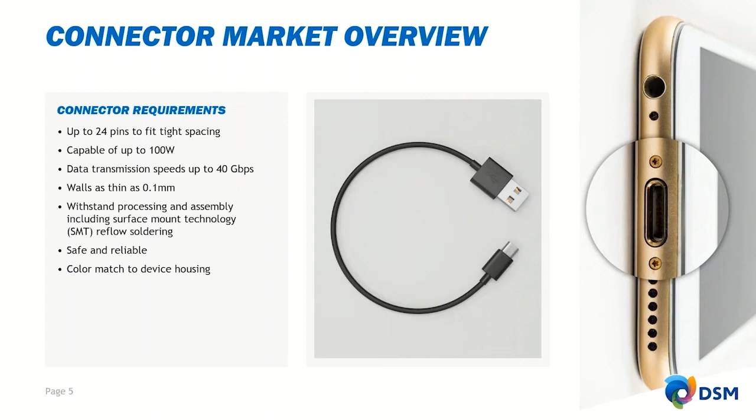Lastly, the color of the connector can be important for design teams to create a visually appealing device or to differentiate the type of connector.

So what does this mean in terms of material properties? The materials need to be thermally stable to withstand reflow soldering, and they also need to maintain mechanical integrity to handle the impact and wear from tens of thousands of insertion cycles.

The material needs to be able to be injection molded in order to make very thin walls with tight tolerances. Weld line strength retention of a material can also be really important for thin walls and small intricate parts so that the part doesn't break.

And the material must allow for fast processing and short cycle times to manufacture millions of components. And this means that the material will need to be high flow.

Safe and functional. Materials need to be safe for people and the environment, and at the same time provide electrical properties that are capable to handle fast data transfer speeds and high power without electrical tracking, and often need to be available in a wide range of colors.

So moving on to the DSM materials portfolio for connectors in consumer electronics.

At DSM Engineering Plastics, we focus on semi-crystalline polymers, which in general tend to perform at higher temperatures. ECOPAXX PA410, STANYL PA46, ForTii PPA, and Xytron PPS, offered in the electronic space, are among the highest performing plastics that support designs covering the breadth of the connector industry.

These industries include automotive connectors, appliance connectors, connectors for consumer electronics, like we're talking about today, connectors for data center networking, and medical connectors.

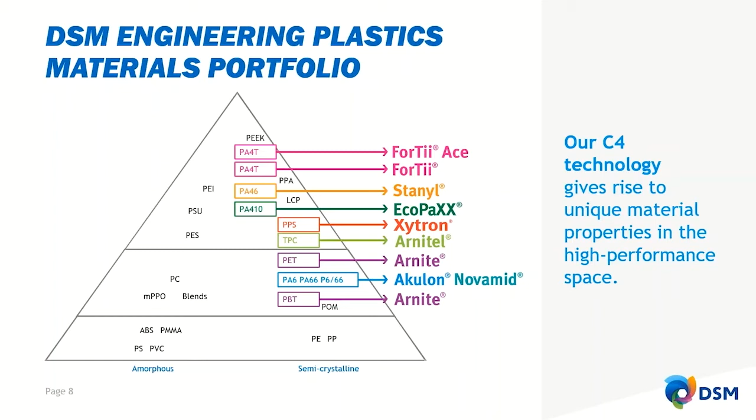ECOPAXX has found success in wire-to-board connectors and installation in power adapters due to its low moisture absorption. And Xytron polyphenylene sulfide has been successful in flat printed connectors and flat flex connectors, FPCs and FFCs.

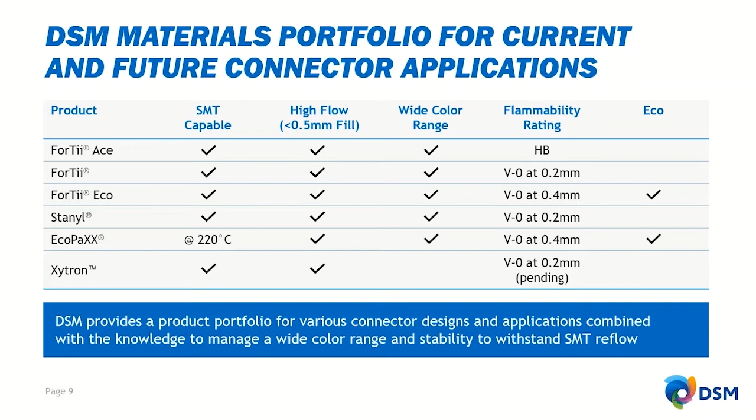Now, going a little deeper into the properties of STANYL PA46 that make it a popular choice for connectors.

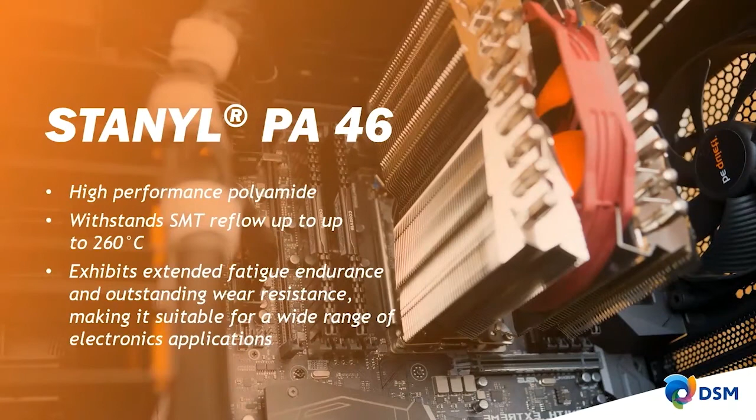A feature that sets STANYL apart from other materials is its colorability at high temperatures. Color matching is important for, as we know, sleek designs of smartphones, tablets, adapters, or other peripherals that we all use every day. And it can actually be difficult to match a specific LAB value, especially after going through

the high temperature reflow process. The colorant can also impact flow and mechanical properties, so it's important to find the right balance between the color and the material specifications.

Down below, I mentioned polycarbonate because it's often used as the benchmark material for colors because it can achieve very bright colors. But STANYL, which is a much higher temperature material, has been developed into a wide range of colors as well, including bright whites.

And it's manufactured to match colors post-reflow. Also worth mentioning is that ForTii and ECOPAXX also have both good color stability.

So as I've already mentioned, the thermomechanical properties are important in order to resist the high temperature reflow soldering process. And without going into detail, the 4-carbon or C4 technology in these polymers lends to higher crystallinity, which means that at elevated temperatures, the polymers can maintain their rigidity.

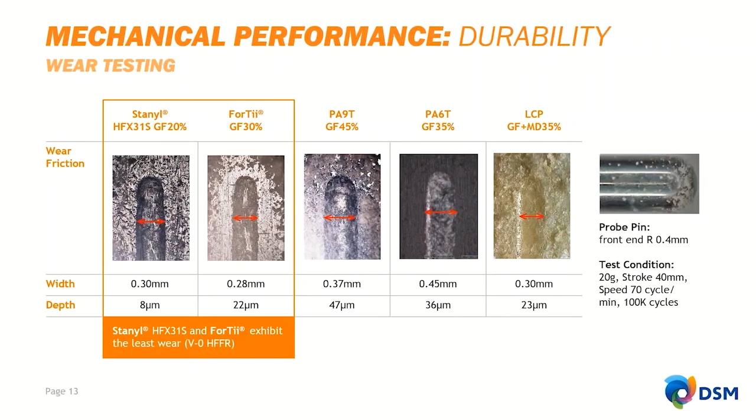In consumer electronics, connector designs can have walls less than 0.2 millimeters. I mean, these things are paper thin. And this can cause problems at the moment of trying to fill the part. Therefore, a high flow material is required, and high flow STANYL is available for these types of applications.

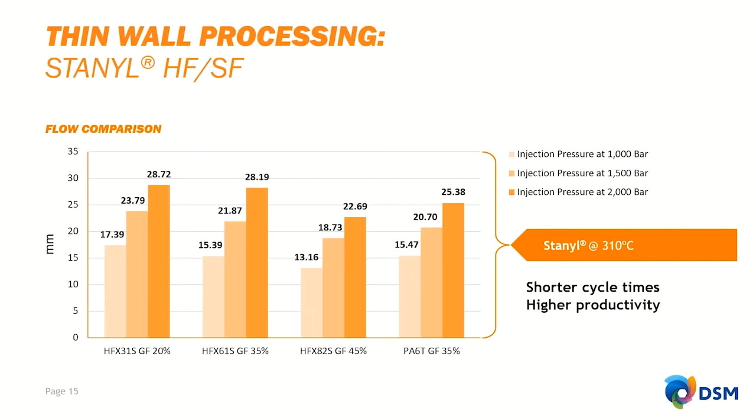For LCP, weld line strength is recognized as being a known weakness in the industry, but STANYL and ForTii both have flow fronts that bond well to retain weld line strength. This is important for parts, especially when they're small and thin, so that they don't break easily at the weld line.

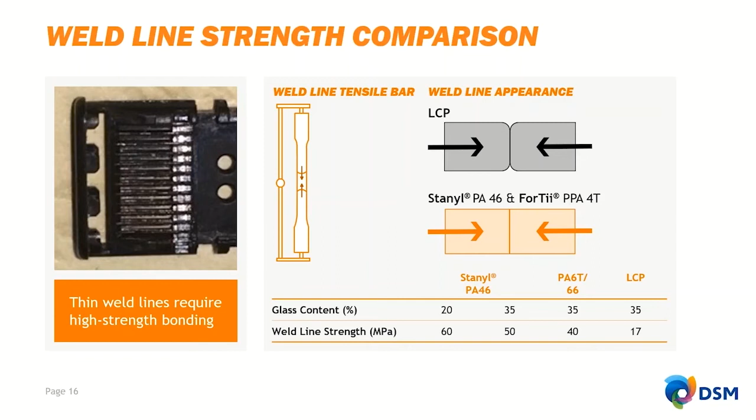A property that can be measured to ensure safe use of a device is tracking resistance. Electrical tracking is defined as the formation of electrical pathways through the material caused by electrical stress, water, or other contamination. As connectors get smaller and smaller and more pins are added, and these pins are required to handle higher power, tracking resistance becomes more and more important.

The comparative tracking index is a way to measure tracking resistance under wet and contaminated conditions. In the test, a salt solution is dripped onto the surface between two electrodes with an applied voltage. The test rates materials by the voltage potential they can withstand before tracking occurs. STANYL and ForTii are both in the highest category for tracking resistance in the CTI test.

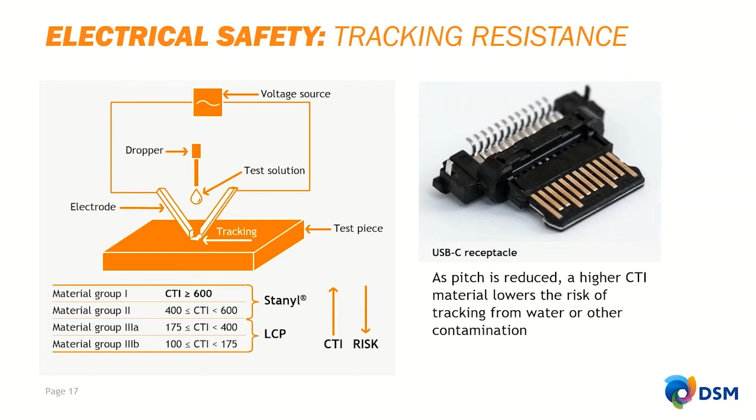In practical terms, this means STANYL will withstand higher contamination on the surface of the connector than the LCP material before tracking occurs. This is important in a USB-C connector because per the standard, the dimensions are set and cannot be changed, so the size of the connector stays the same. But what can be done is to use a safer material that has a higher CTI value like STANYL, which will ensure a safer device and component.

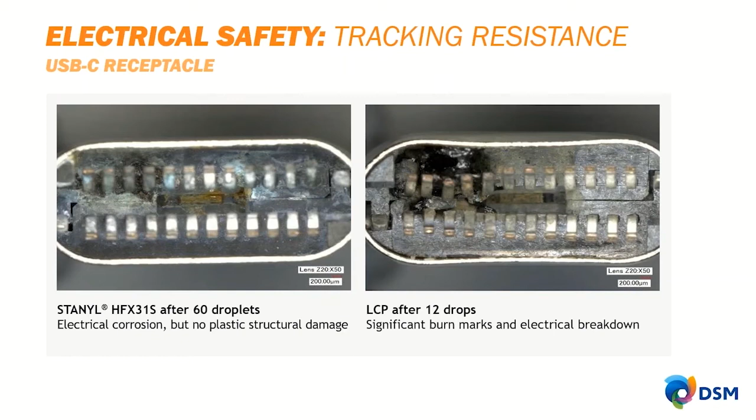In electrical data properties, the dielectric constant for STANYL is approximately 3.6 in the 10 gigahertz frequency range and remains stable as frequency increases. Stability is key for designing today's connectors so that engineers can predict how the component will perform at high frequencies.

What you notice is that the material is somewhat inherently hygroscopic because it is a polyamide, and the dielectric constant can increase with increasing moisture, also affecting the dissipation factor. However, for extremely harsh conditions that have high humidity and high temperature, ForTii PPA will perform really well because it takes on little moisture. At 10 gigahertz, it has a dielectric constant of around 3.8, at 23 degrees Celsius and 50% humidity.

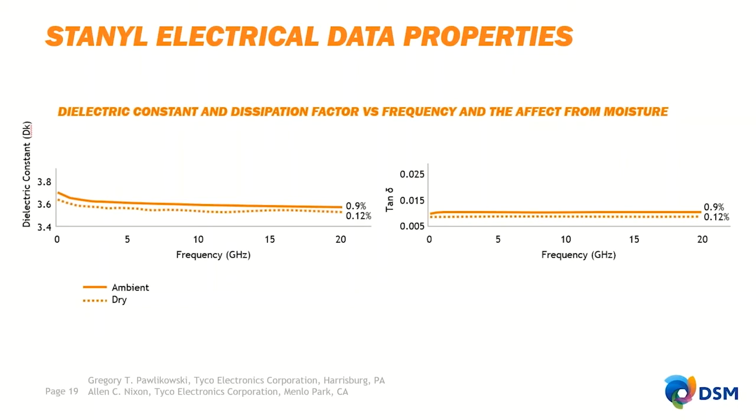The ability to seal smart devices from water or dust is a concern for manufacturers, and it can actually be really challenging. There are different methods that can be used to create a seal, including sonic welding, laser welding, the use of adhesive, or overmolding in order to seal the gap between the metal pins or metal shielding and the plastic housing.

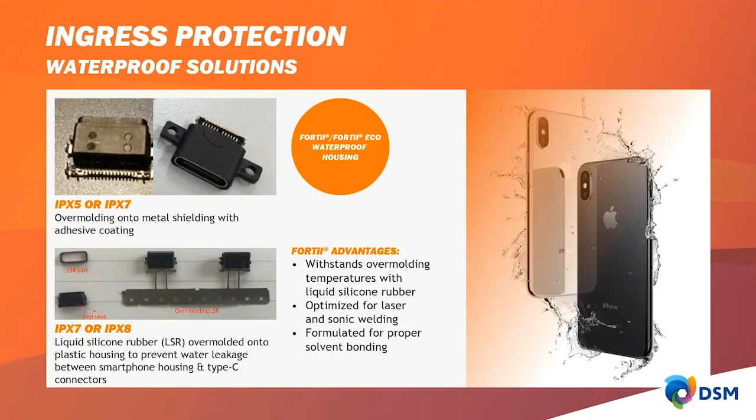So moving on to ForTii in more detail, another SMT-capable connector material. So like STANYL, FORTI is based on 4T technology, but with terephthalic acid, offering the same high CTI rating and flame resistance, but it offers a higher modulus than STANYL. In the FORTI family are ForTii, ForTii Eco, and ForTii Ace.

All grades withstand the processing temperatures of the SMT reflow soldering. The FORTI family can be generally described as polyamide with high mechanical properties and good chemical resistance. They maintain stable dielectric properties, and the connectors can be processed without concern of blistering from moisture because the material takes on very little moisture. FORTI Eco is manufactured in part from a biomonomer, and FORTI Ace has the highest melting temperature in the PPA family of polymers.

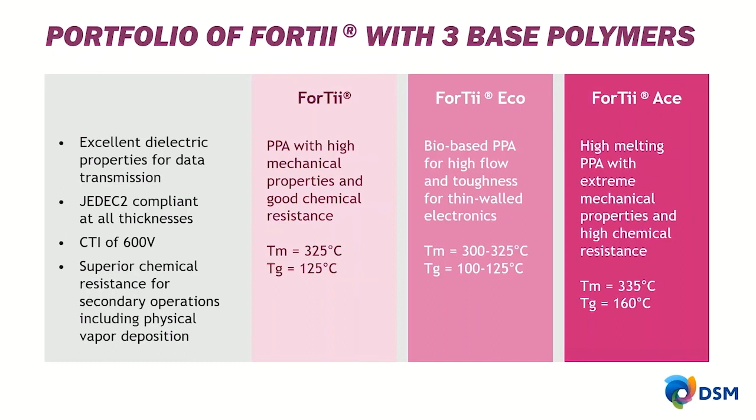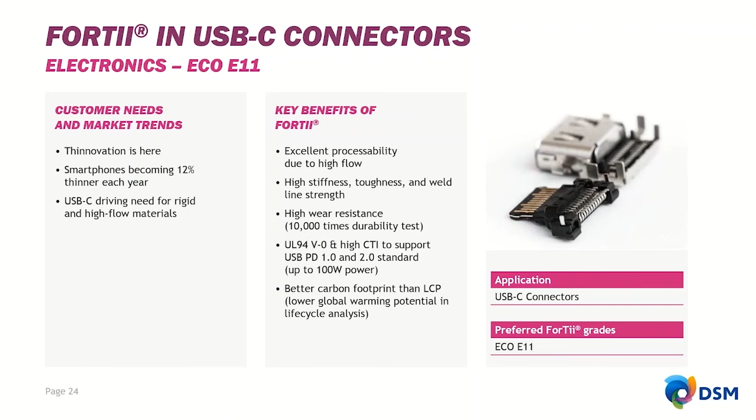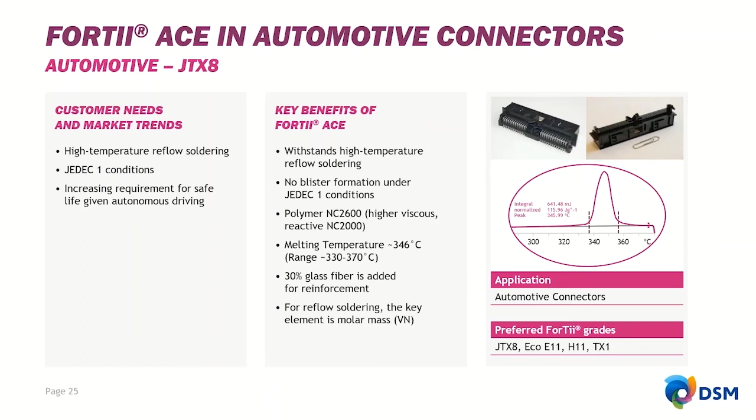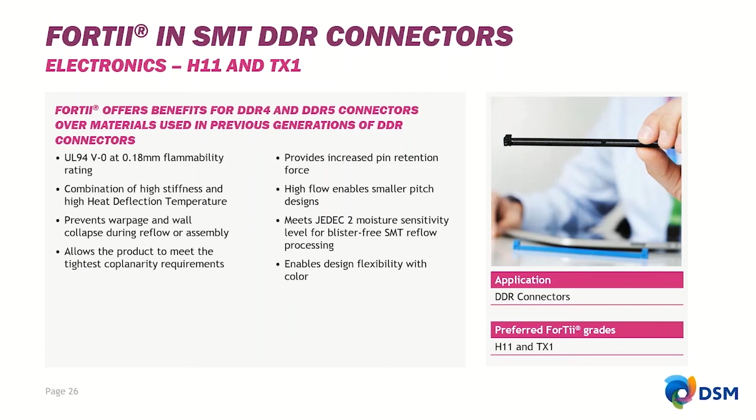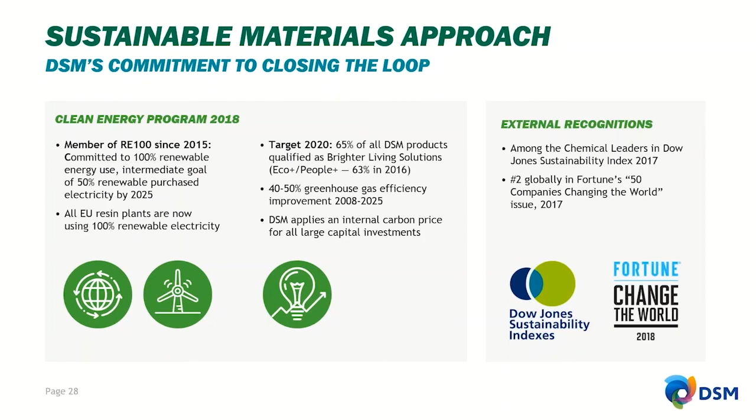That brings me to our section on ECOPAXX PA 410. ECOPAXX is a material synthesized from two monomers, 1,4-diaminobutane that provides the 4-block and sebacic acid providing the 10-block. The sebacic acid is derived from castor oil, 100% of that oil coming from castor plants, and this results in roughly 71% bio content of the neat resin.

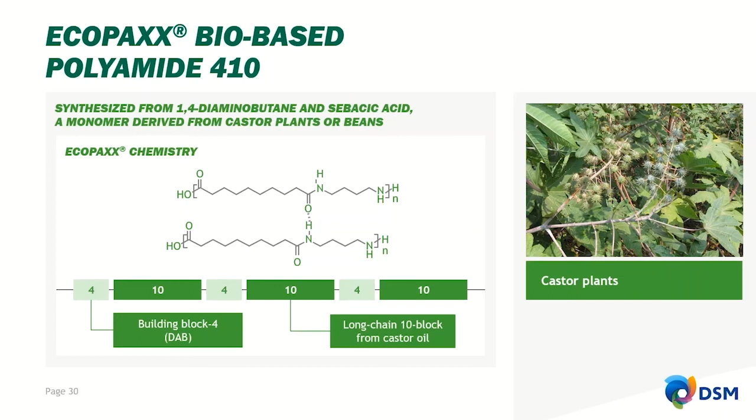Other benefits of ECOPAXX include that the material is carbon neutral from cradle to gate. The plants are a renewable resource, and they don't compete with the food chain. And the production is a source of global economic development.

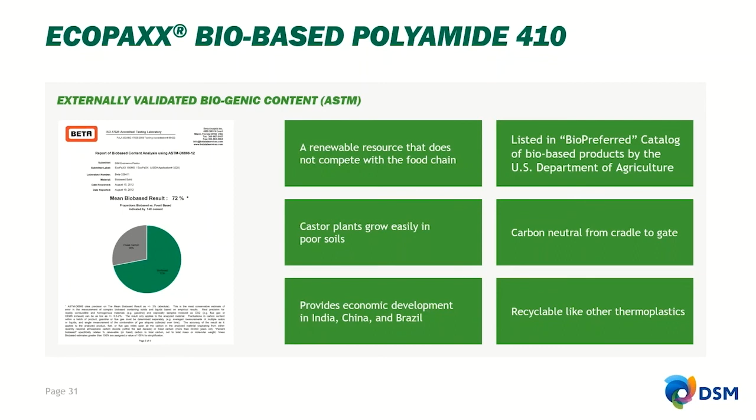Okay, so the properties of ECOPAXX. Of the aliphatic nylons, ECOPAXX has the highest conditioned modulus. This is in part due to the low moisture absorption of the material, and it also contributes to having excellent dimensional stability in different environmental conditions, and contributes to the high electrical strength. ECOPAXX also has a high elongation at break, which makes it a tough material. So all around, the combination of properties make the material great for use in electronics.

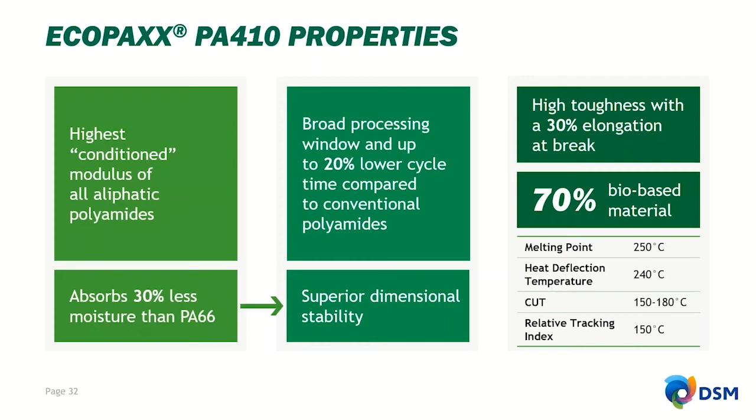A couple of applications for ECOPAXX in consumer electronics. The power adapter is a success story where the incumbent material was changed to a high eco content material, being ECOPAXX. Lending to its success is its processability for thin walls, its high electrical strength, and flammability resistance. Also, its electrical strength made it capable for thinner walls than the incumbent material, so that the engineers could design a smaller component.

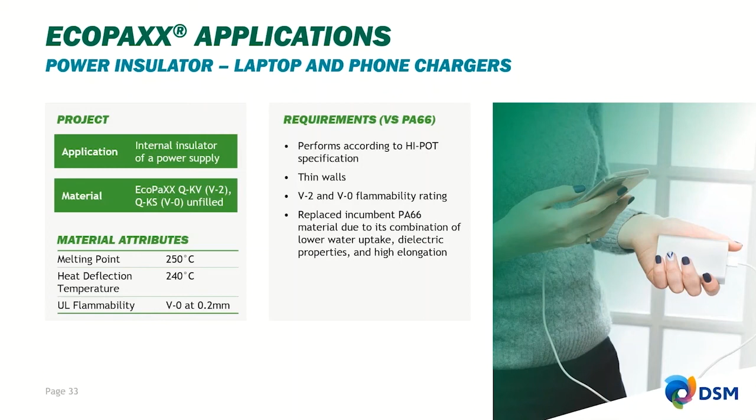So before leaving the section on sustainability, I wanted to note that a life cycle assessment was completed for STANYL. It was compared to the same assessment for LCP. The study showed that STANYL has a 25% reduction in its carbon footprint. And we're always looking for ways to improve upon the carbon footprint of STANYL.

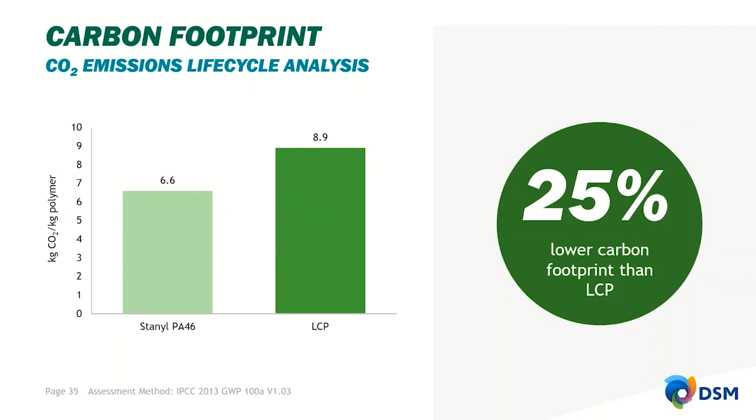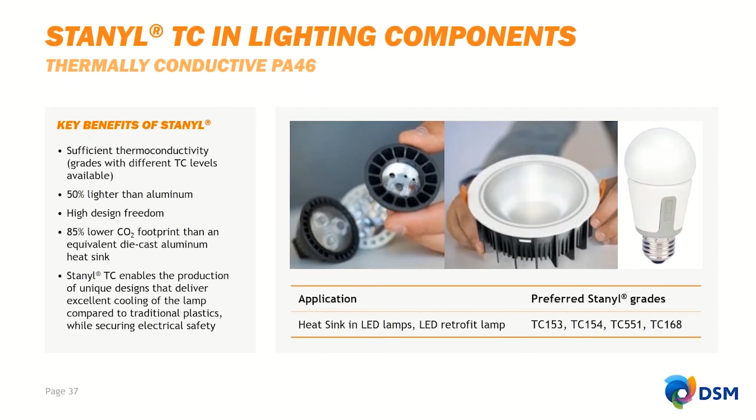Now I'll move on to touch on a few novel applications for these materials in other areas besides connectors, but still staying within the market of consumer electronics. So as you probably know, plastic is an insulator, so heat will accumulate in the material. Therefore, a thermoconductive grade of STANYL was developed to enable cooling compared to traditional plastics. And because it is a plastic, it reduces the weight compared to aluminum or other metals.

Here we have a successful part that was developed for LED lighting. The plastic part is lighter than an aluminum part if it was made the same way. And it also provides a huge savings in CO2 emissions. A potential application for thermally conductive STANYL includes housings or battery casings in electric vehicles where heat needs to be drawn away from the battery and keep the battery cool.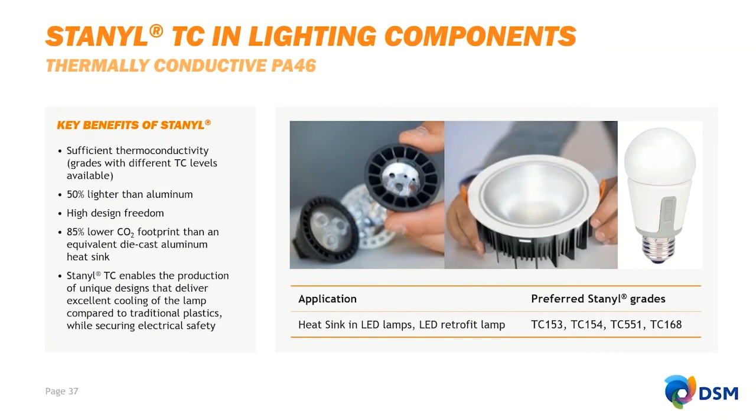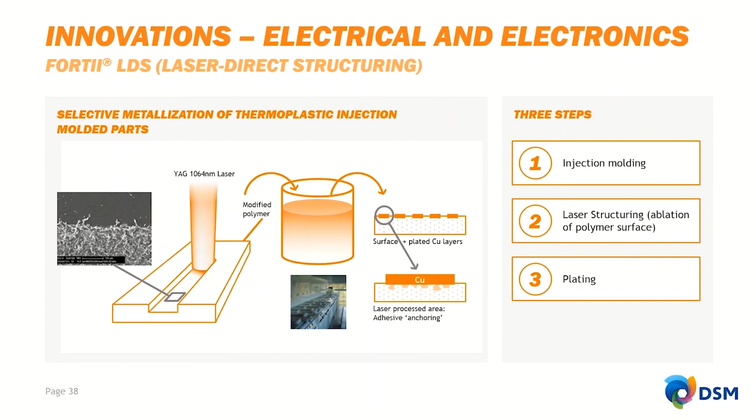An area where laser direct structuring has had proven success is in mobile phone antennas with ForTii LDS. And this is translatable for various kinds of antennas for TV, notebooks, wearables, speakers, or automotive. And with 5G devices coming online, laser direct structuring will have more and more importance in this type of application because one device will likely have several antennas in 5G.